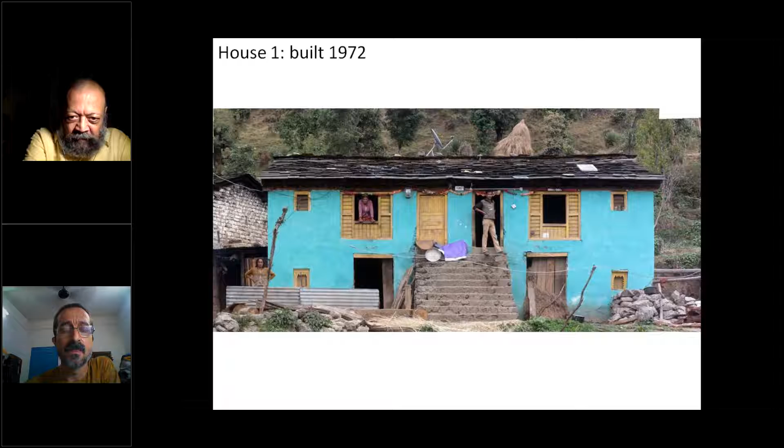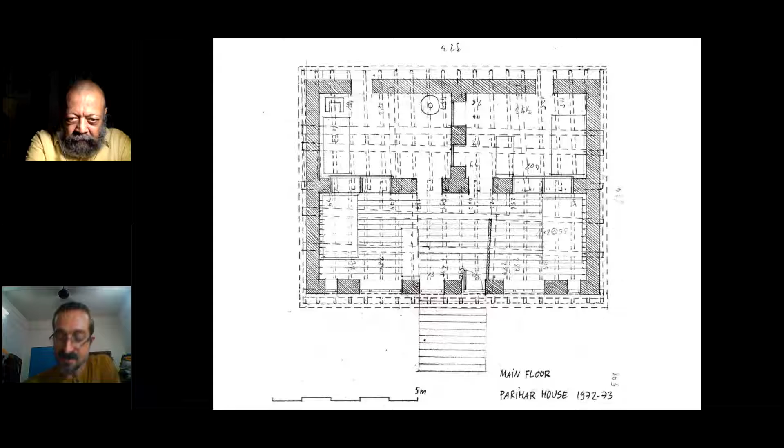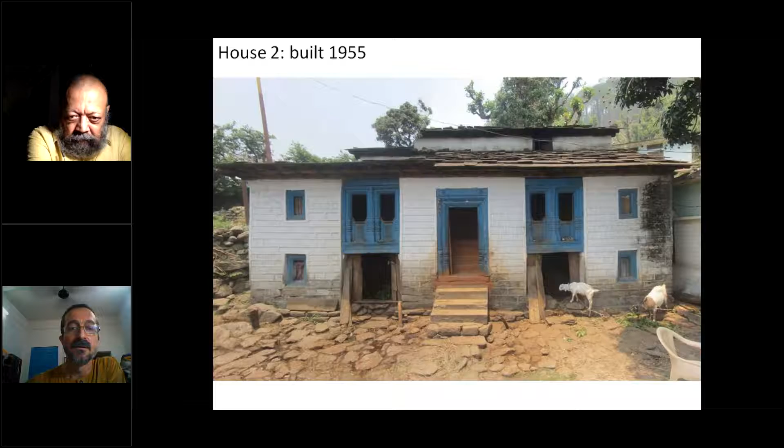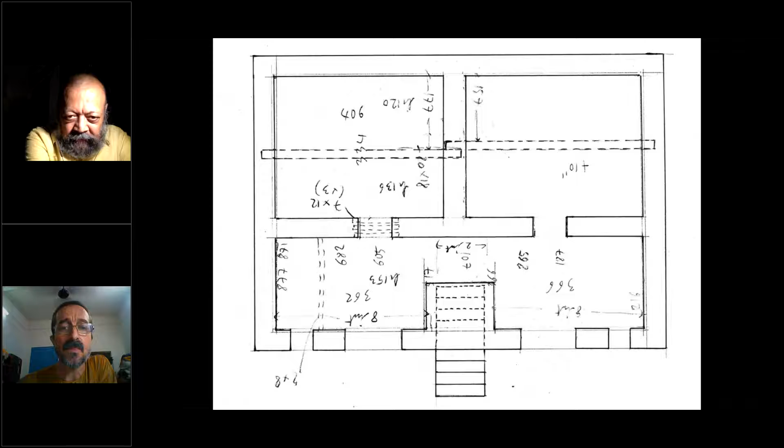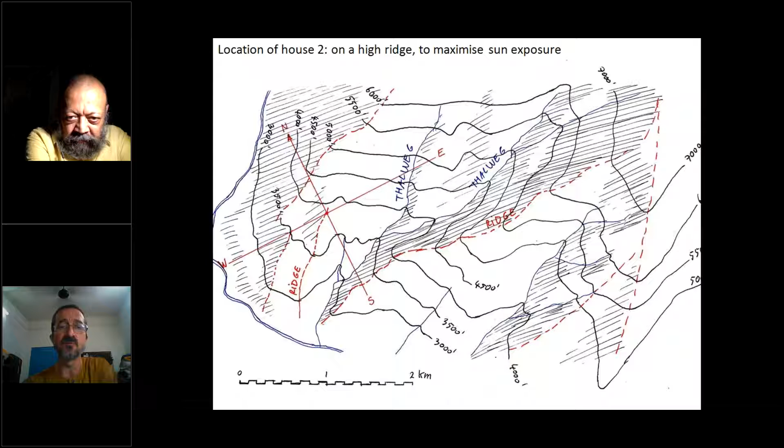This is a measured drawing of the main floor, of the ground floor, where the cattle stays. This is a section, some details. And this is a contour which you can get easily from Google. You can trace the contour on Google Maps by using the levels.

Now I want to show an exercise which I learned from my professor Jacques Fredet in the School of Architecture. It is an exercise by which, after you have done a measured drawing, or if you have a drawing of an existing building, you try to recompose a sequence of decisions that have led to the design as it is, with the basic assumption that every decision has some reason. This is the only assumption you have to make.

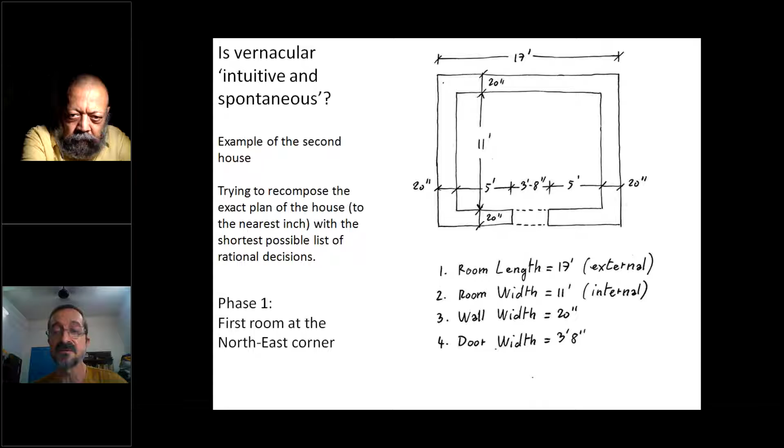Generally, in vernacular architecture, the measurements are in round numbers. It will generally be in feet, or maybe to the nearest 6 inches. So these are the basic dimensions of one room. This is my supposition: I think they started with one room in one corner, and I get round numbers everywhere. So basically 4 decisions: the length, the width of the house, the width of the door, and the thickness of the wall.

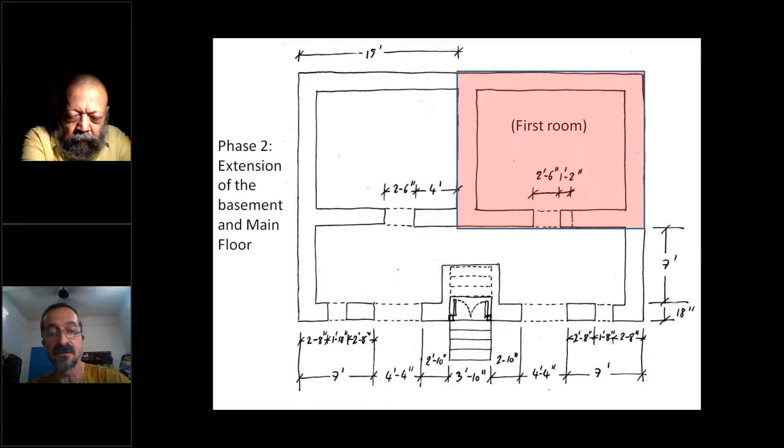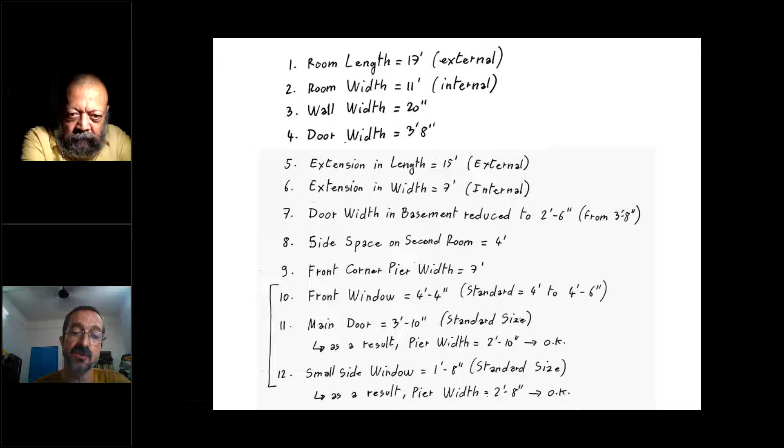These are 4 decisions necessary to make this room as it is. Then, again this is my assumption, but I think the house has been extended on the left. So in red is the first room, and in black and white is an extension. This is a series of decisions taken to extend the house on the left. There are 9 decisions, and some of them are not really decisions, like the width of the pier — it is a standard width, and all the widths of doors and windows are also standard. They are the same in this region of Uttarakhand. So what you find is that you have a very small list of decisions which leads to a plan.

And it is very rare that you find this in architecture done by architects. In vernacular architecture, generally the decisions are highly rational and highly constrained, because these people do not have excess money, and there is not much scope for fantasy.

And it is really very striking for me that you get some extraordinarily beautiful results in such difficult conditions, where money, time and resources are all in short supply, and yet they achieve these results.

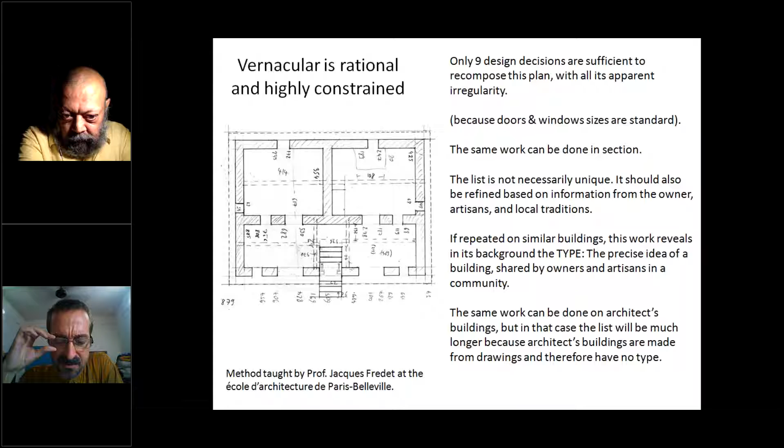So, one definition of vernacular architecture is that it's architecture done without drawing. So how can you make architecture without drawing? The answer is in the type — what we call the type of building — which is a mental idea of the building that is common within a community.

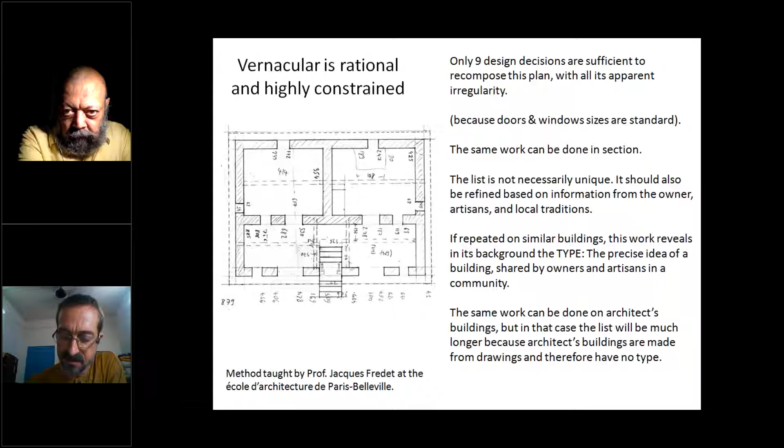He was working several days making these drawings. One day he saw an artisan coming, and the artisan asked him what this complicated drawing was that he was doing. He explained, and the artisan told him, 'It's very simple, I will make a 3D model in plaster and give it to you tomorrow.' The next day the artisan brought the capital, done absolutely perfectly. Then the architect made a drawing based on the model done by the artisan, and he could officially hand over the drawing to the artisan so that he could execute the model.

So this is very interesting because it shows that architectural drawing is always based on a set of available skills. Basically, a drawing is a description of a work to do, and as our basic assumption we need some existing techniques, methods of representation, and typical objects which exist. So it means the notion of type is still very much present.

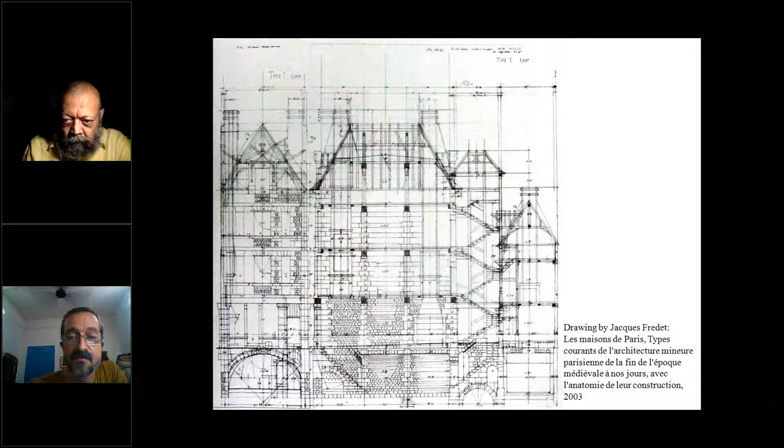This is another drawing which he made on AutoCAD. I was, like all his students, very disappointed that he started to work on computer, but I think he took it as a kind of exercise to prove that it was also possible to use computer to do this kind of drawing.

This kind of drawing raised many questions. I met some senior conservation architects in India. They told me, we don't need measured drawing, there are too many measured drawing already, what will we do with all these measured drawing? It sounded very strange to me, like someone telling me we don't need to do yoga anymore, we've been doing yoga for hundreds of years, why do you need to still make yoga after so much yoga?

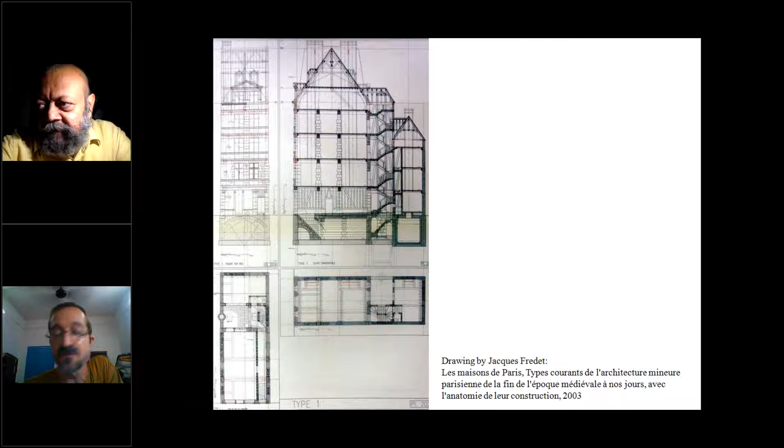It's the same reasoning. So to do a measured drawing is not to keep it in a store somewhere, it is, we do it for the sake of doing it. It is a learning exercise. This is why Jacques Fredet did this drawing. For him, it was to keep the memory of these buildings, because these buildings, as he was saying, were being destroyed at the rhythm of arbitrary executions. He was seeing all these buildings being destroyed one after another.

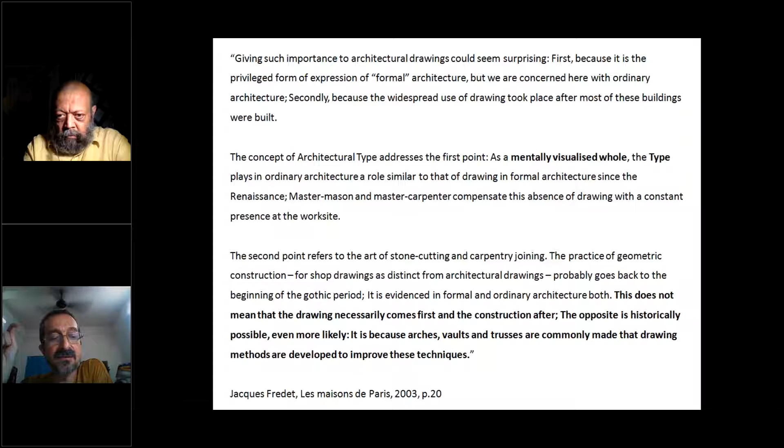And now, why making today drawings of buildings which have been made without drawing? His answer is that these buildings have actually not been made without drawing, because there was an ancient art of stone cutting and carpentry joining, which is what we now call shop drawings. This does not mean that the drawing necessarily comes first and the construction after. The opposite is historically possible, even more likely. It is because arches, vaults, and trusses are commonly made that drawing methods are developed to improve these techniques. So it happened quite often that the art of making drawing happens after the art of building has started.

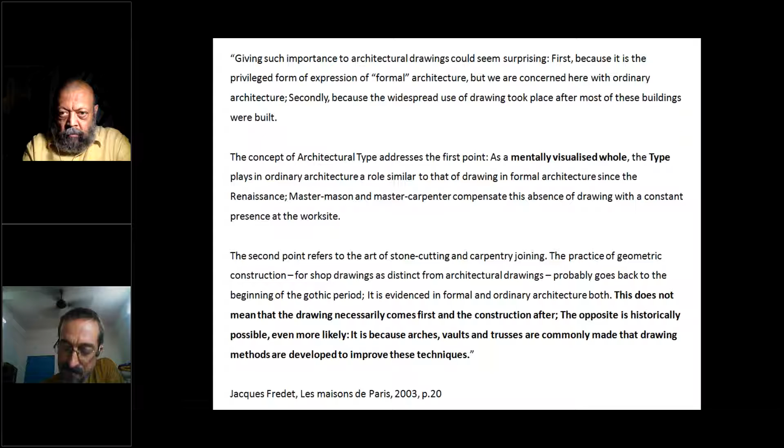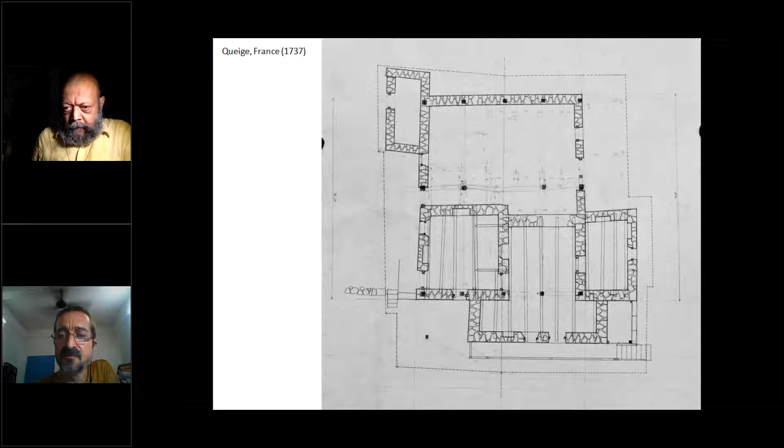I want to show some examples of measured drawing. This was a house of my parents in the Alps, in the French Alps. This house was built in 1737 and it was covered with thatch. This is a plan, it fits approximately in a square of 20 meters by 20 meters. The walls are made of stone with mud mortar, and you have a massive wooden framework made of chestnut trees.

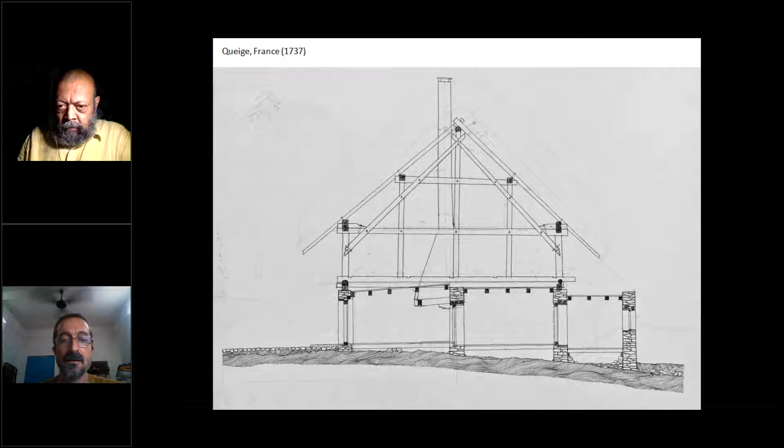This is another house in West Bengal in Birbhum near Rampurhat. It has a very interesting veranda with a huge opening. You can see on the plan on the bottom right, there is a beam and there is a wooden framework in the middle of the veranda. So it creates a huge opening right in the middle of the house with a big amount of light entering.

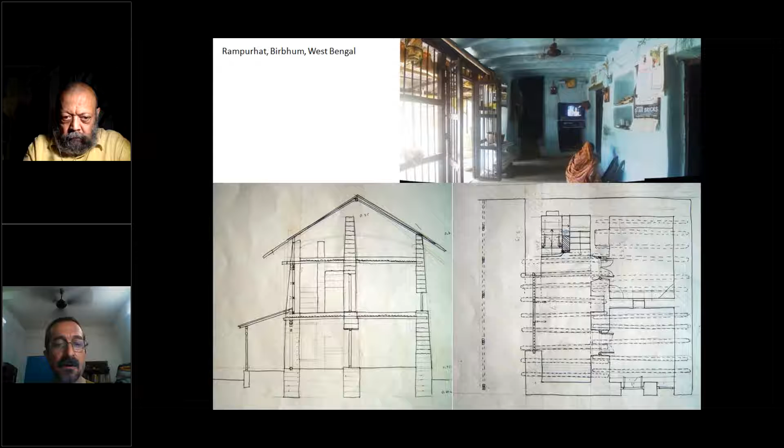Now I would like to start talking about how structural design has helped me do as an architect what I wanted to do. This is a building I built in 2003 for very close friends who wanted to make a school in his village. And very generously, he told me, Laurent, you do whatever you like, I will not ask any question, you just do your building.

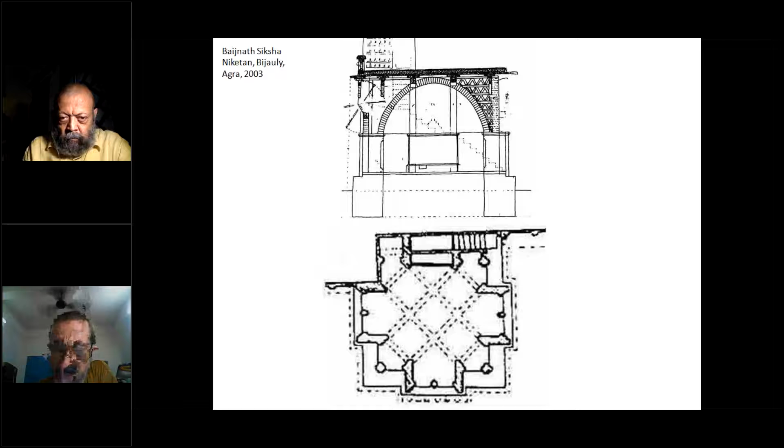So I decided to do a building which would not have concrete and also not have steel. I did not succeed in eradicating steel, it has 200 kilos of steel, but it has no concrete. So this is a plan. It was inspired by arches crossing each other at 45 degrees, which is a design you find in many churches of Armenia. These are some detailed drawings which I did to study the brickwork and the exact dimensions.

Another detailed drawing. This is how I found the profile of the arches. I needed arches which would be in catenary so that they would be stable under their own weight. On the left, you can see there was a wall on the site itself.

I hung a rope and traced at the scale of 1:1 the arch, even tracing every brick, in a reversed form. On the top left of the photo, you can see in section view the masonry pier and the thrust line continuing into the masonry pier. And it was showing that the thrust line falls right in the middle of the pier, so it was perfectly stable.

On the right, you can see how I made a kind of brick formwork in which I bent bamboo. This is something I would not repeat today. I would do it with steel instead, because bamboo is very strong, but the joints are very slippery. Steel would have been much better because it's welded, it doesn't move, and you can reuse the steel.

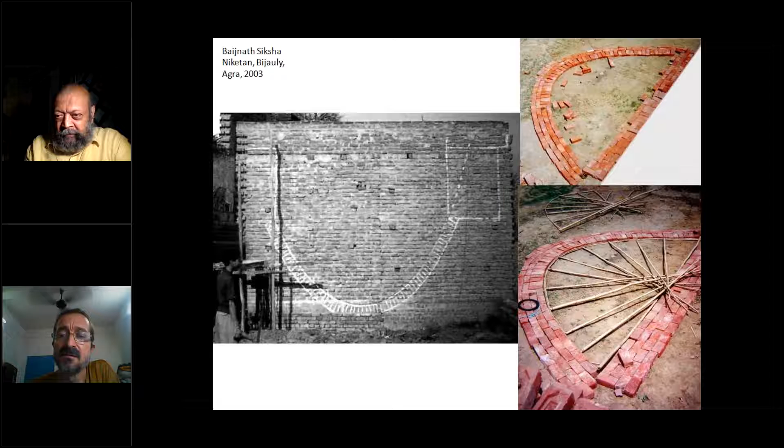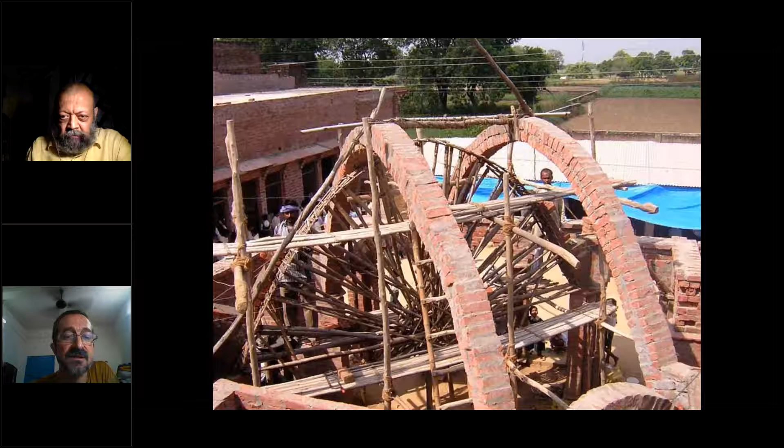So anyway, we built the arches this way. Here you can see the bamboo shuttering.

Two arches are already built, and we are making the third one. The two arches on top are attached together by a piece of wood. This was absolutely necessary to stabilize the arches, because they were standing on their own without any lateral balance. So this temporary wooden frame was absolutely necessary. Here you can see how slender they are.

Now I would like to share a personal experience with you. When I was building these arches, I had checked their stability by calculations several times. And one morning, very early, I woke up from a nightmare. I had dreamed that the entire village was running after me because the building had collapsed and killed 20 children. I was running through the countryside, and then I woke up.

I sat at my desk again and made the calculation a third way, and again found there was no way it could collapse. On the bottom right, I've written the calculation. It's extremely simple: you calculate an arch by the standard formula. It's basically a beam, and you consider the rise of the arch like a lever arm. You find the thrust, the force in the arch, and the stress. The stress was very, very low. It could take a massive load, and because the arches cross into each other, the buckling length was also very low. So there was absolutely no problem, and I went ahead.

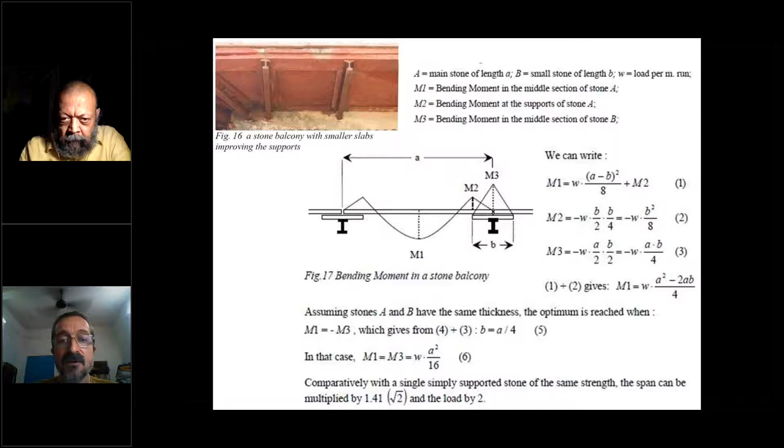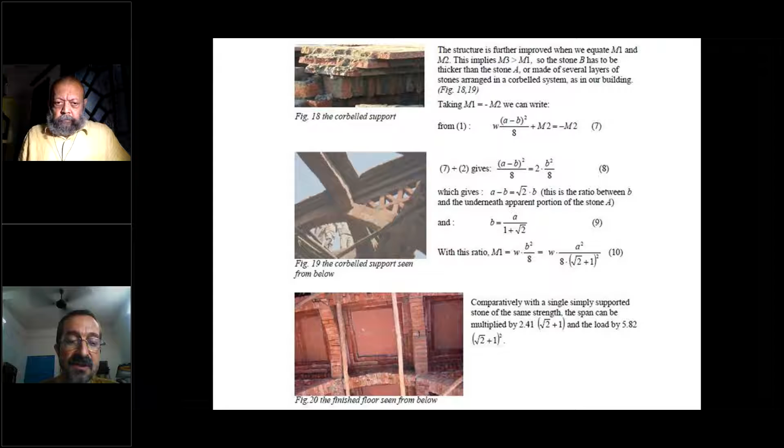Now I come to the system -- why I wanted to study this corbel system and how I could increase the span. I placed a series of corbeling. On the photo bottom left, there are 3 successive corbels. Like that, I could increase the span even further. So these are the calculations, and this is the construction.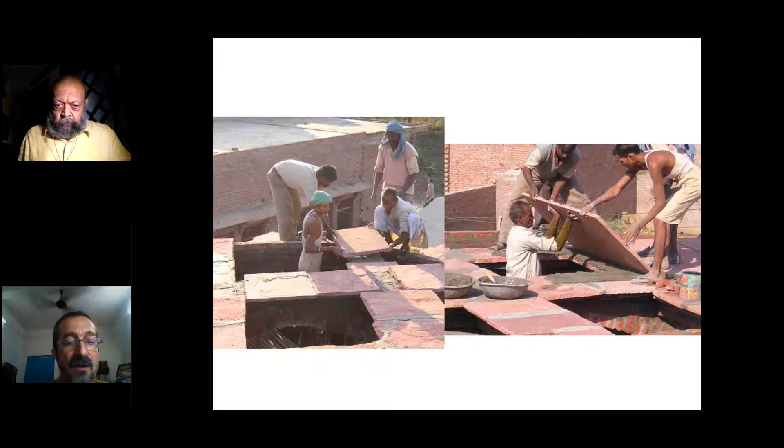And here on the left, we are placing the corbeling stone, and on the right, we are placing the large stone.

The villagers were a little anxious. Sometimes they'd ask me, Laurent, when shall I call the concrete mixer? I'd say, why concrete? There is no concrete. They'd say, are you sure? Yes, yes. But it was only when we had placed this stone that they truly believed there would be no concrete. So all my friends, his father, and the friend of his father, everyone was there to celebrate that the roof was finally covered.

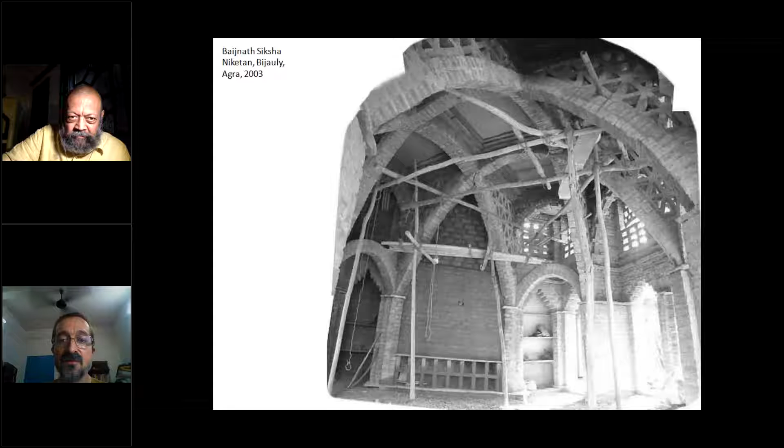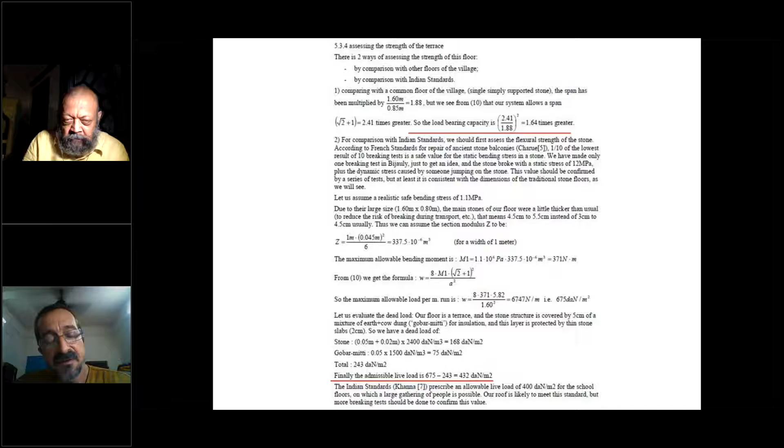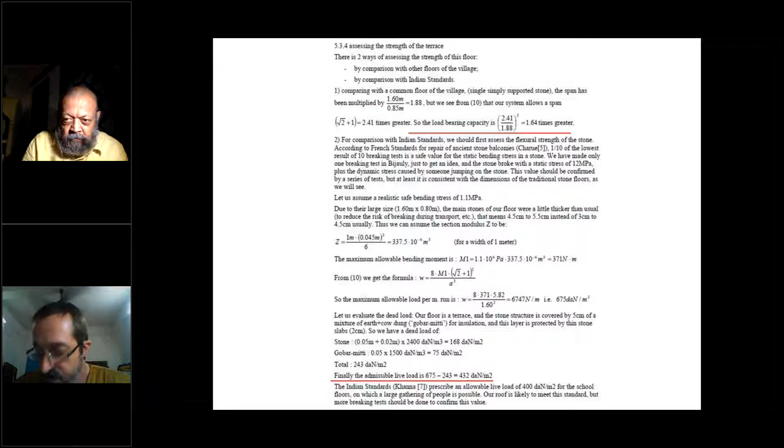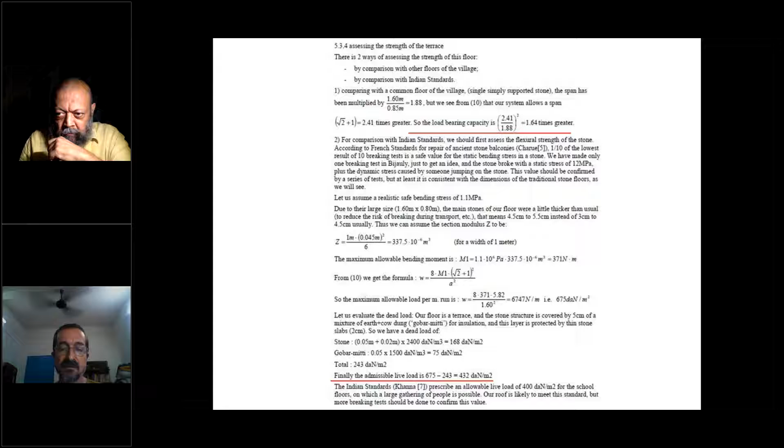This is some calculation I did to compare the actual safety of this floor with other buildings. There are two ways to compare. One is with the conventional floor system used in this region, which is valid because that system has a safety level people expect, and the notion of safety is related to expectation. So it's important to have a socially accepted standard. I found it is about 64% stronger. Comparing with Indian standard, I found it can take 432 decanewtons per square meter, which is good, since the Indian standard prescribes 400.

Now, this is another project I did while working for architect Dulal Mukherjee in Kolkata, and he gave me a very nice opportunity to do a lot of experiments.

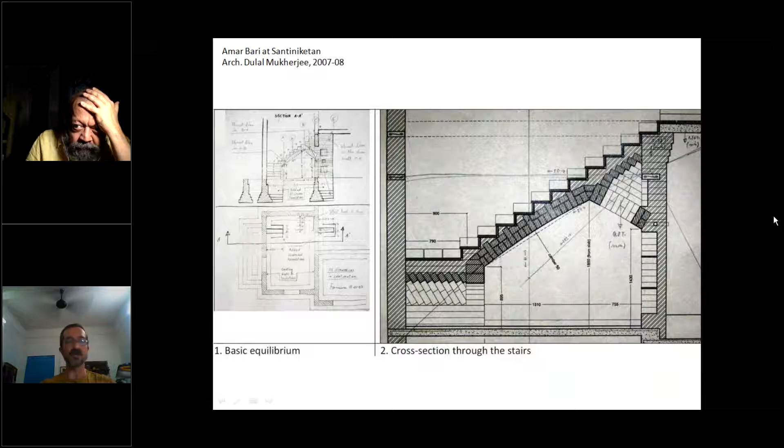So first, I wanted to do a staircase without concrete, based on an almost flat arch, an arch with a very light camber.

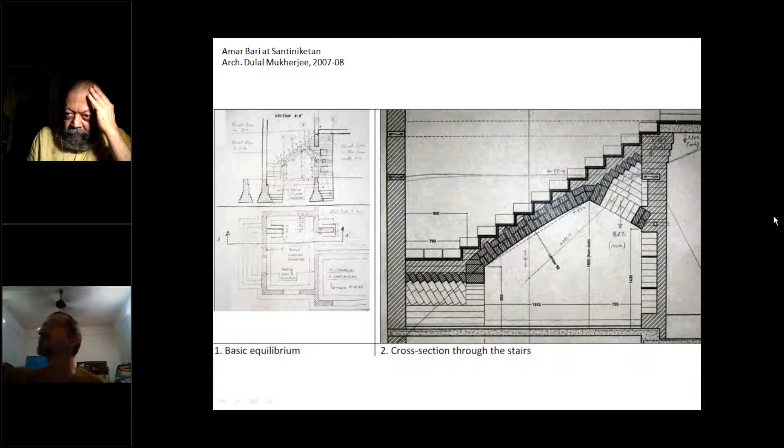These were the calculations I did. Dulal Mukherjee had two in-house engineers, and they were very afraid to do a staircase without concrete. So I did this calculation and showed it to them, but they were having none of it. They told me, no, sorry, Laurent.

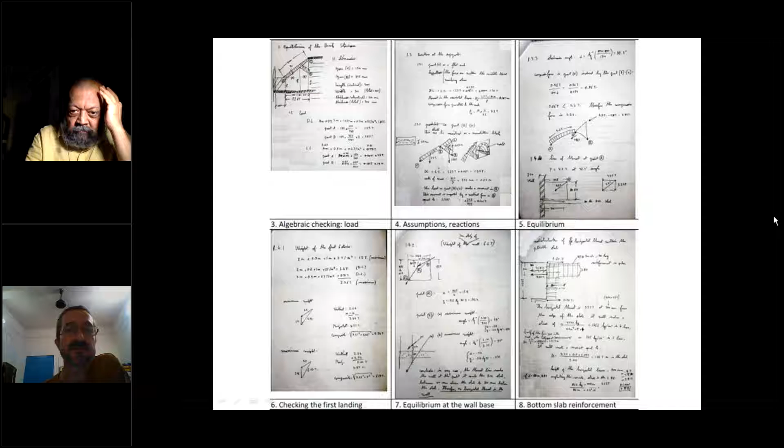Okay, this is a completed staircase.

Okay, I'm doing first. Now I want to show you practically how. Screen. Do you? Oh, now I have to share my screen. Show screen. Can you see my screen? Yes. Yeah, can see your screen again.

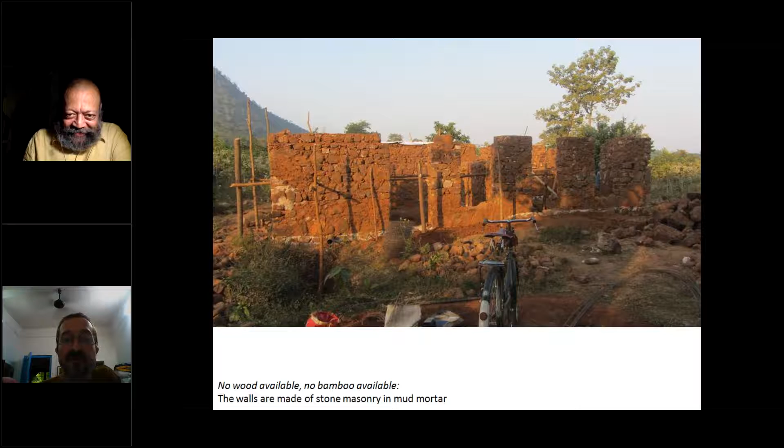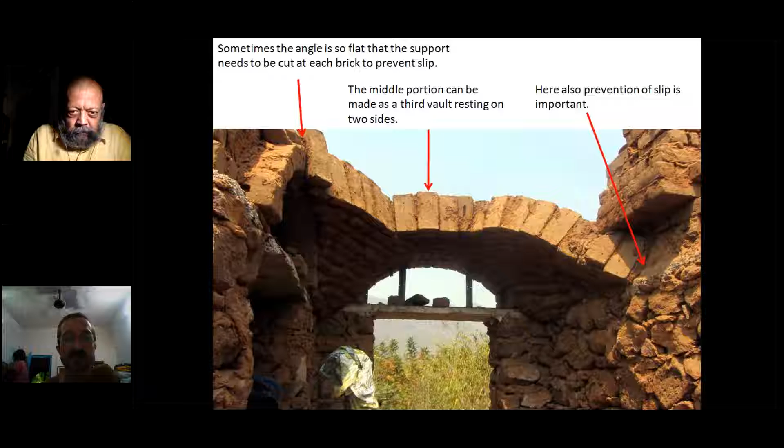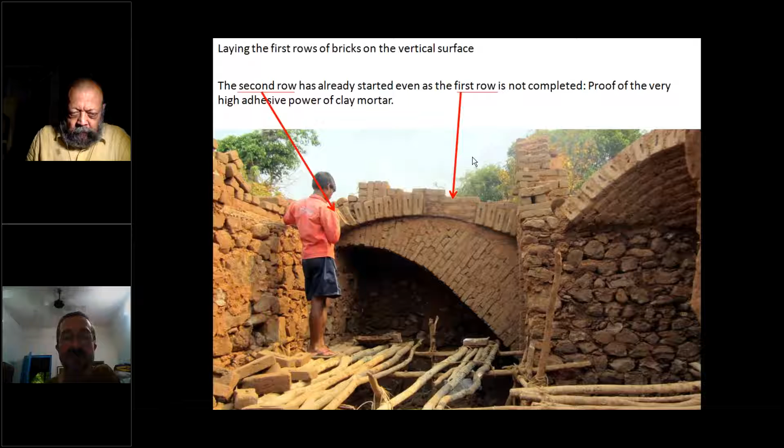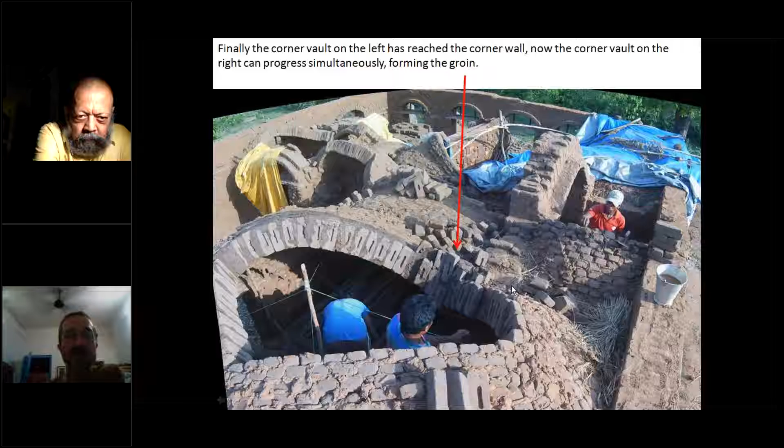So this is how the vaults were being done. This is the inner corner, inside the middle of the room, and it was a bit difficult, but we managed to build without shuttering. Here you see the corner growing, coming inside, and this is a completed room.

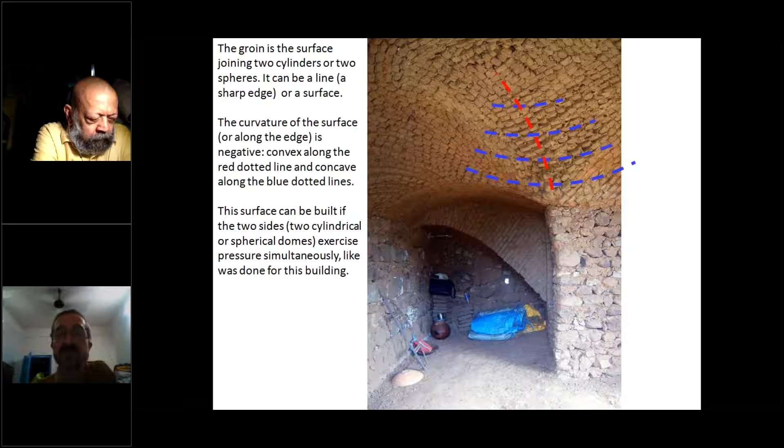This is called a groin, meaning it has a negative curvature. Here you can see the negative curvature, it has the shape of a saddle. So it is possible to build even this without shuttering using adobe. Adobe is an excellent technique to learn how to make this; you gain a lot of understanding of the structural behavior of domes and vaults.

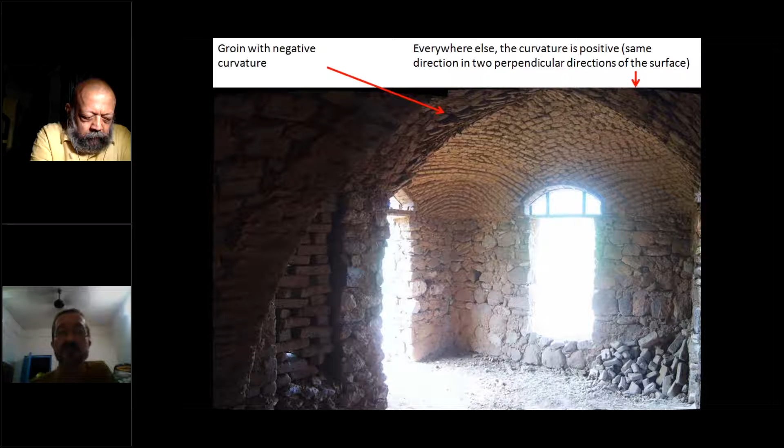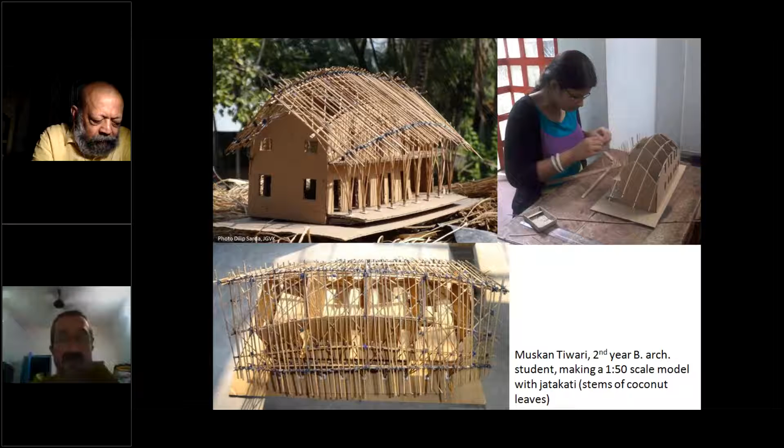This model shows each bamboo, absolutely every piece is there. So looking at the model, the mistri could elaborate a process of construction. These are the working drawings, and these are joining details. Everything is joined by lashing, bamboo to bamboo, and bamboo to concrete.

It uses the Colombian method of joining, elaborated by Oscar Hidalgo and Simon Velez, where you grout a rod inside the bamboo.

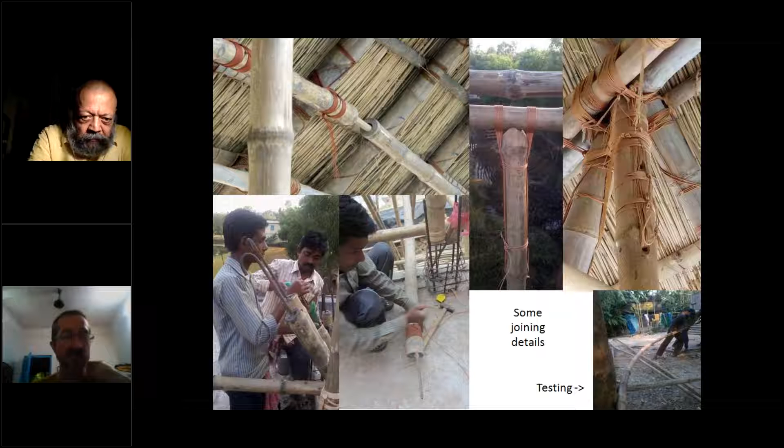Some joining detail: very often in bamboo joining, especially whenever you use lashing, there must be an eccentricity because the bamboo must extend beyond the point of joining. I'm showing on the left this eccentricity, so you need to keep this in mind when you make your purlins and rafters, and if you're systematic, it works very well.

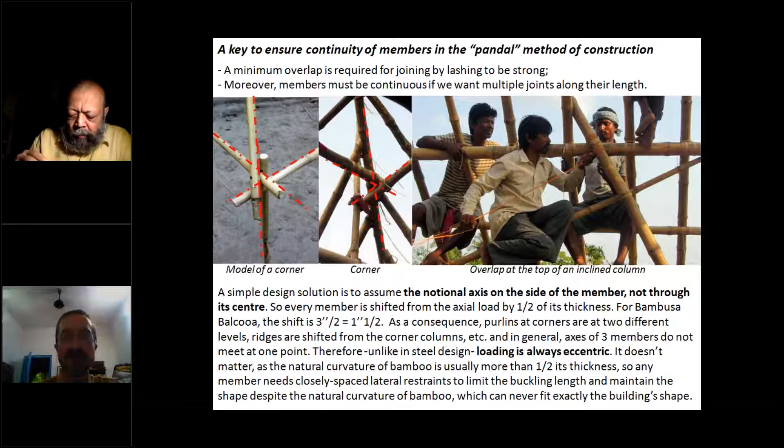So these are some construction photos. This is another similar building, a house, and there's a calculation for the bamboo.

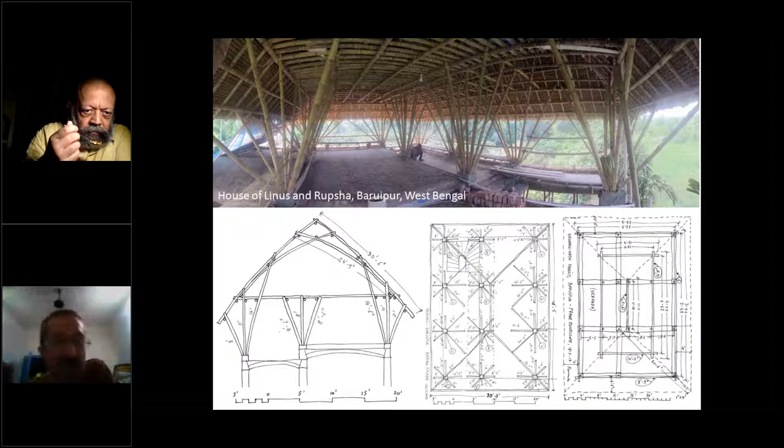The view of the house. Some view of this, this is a staircase which was done by a dome mistri, essentially using the dome technique, but in a slightly different way.

This dome technique is a very ancient technique, but recently, in the last 30 years, mistris from Uttar Pradesh have developed a way of making domes without shuttering, using normal cement mortar, which is a totally new innovation. Generally it was done with plaster of Paris, with mud, using tiles, but never with bricks and cement. Now we can use normal bricks and normal cement. This technique becomes really low cost and available to everyone. Actually, it is cheaper than a concrete slab.

This is a spiral staircase made of bamboo, the same house. This is a roofing detail with thatch, very high quality thatching done by Matha Chaat, which is a thatching company from Bhuj in Gujarat.

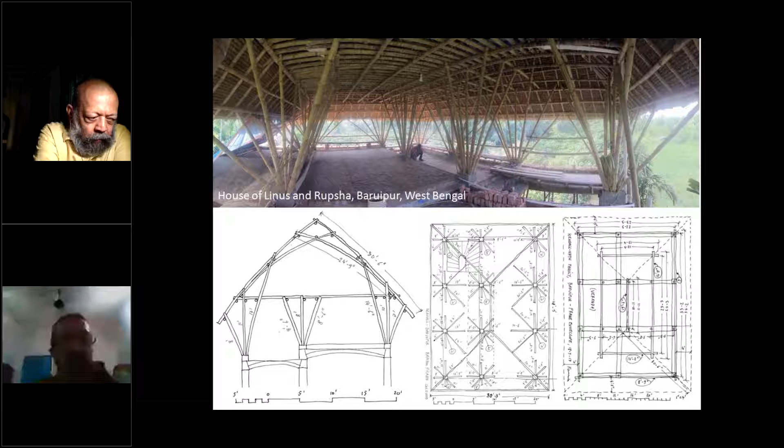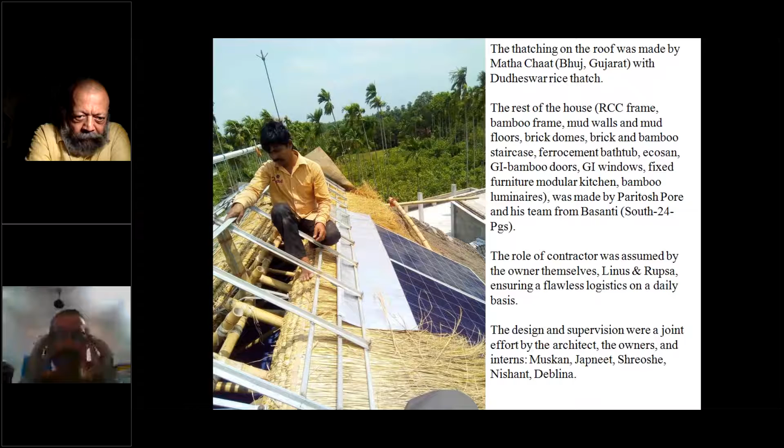What is very interesting, Le Corbusier had these 5 tenets of modern architecture. During my studies, I hated Le Corbusier. These 5 tenets were building on stilts, roof terrace, free plan, horizontal windows, and free elevation or curtain wall. As a student, I was wondering how Le Corbusier became mad enough to write this.

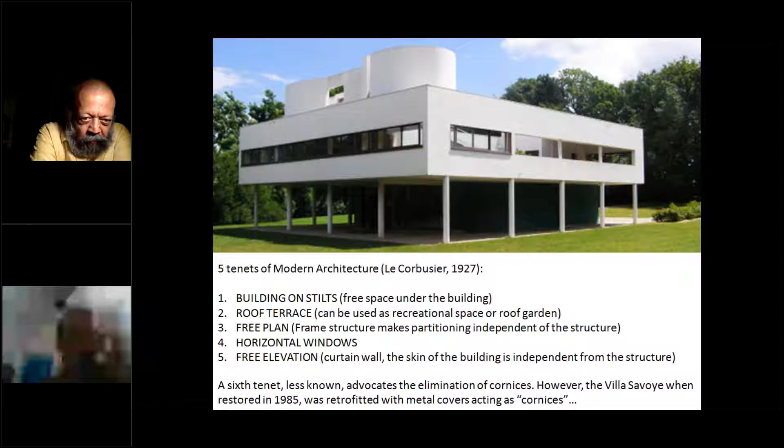Then just 2 years ago, after I completed this house in Baruipur, I found that I have actually followed these 5 tenets. My house is on stilts. It has a roof terrace. It has a free plan — the partition and the column are totally independent. All these columns are slanted, so of course this cannot be slanted. Horizontal, all are horizontal.

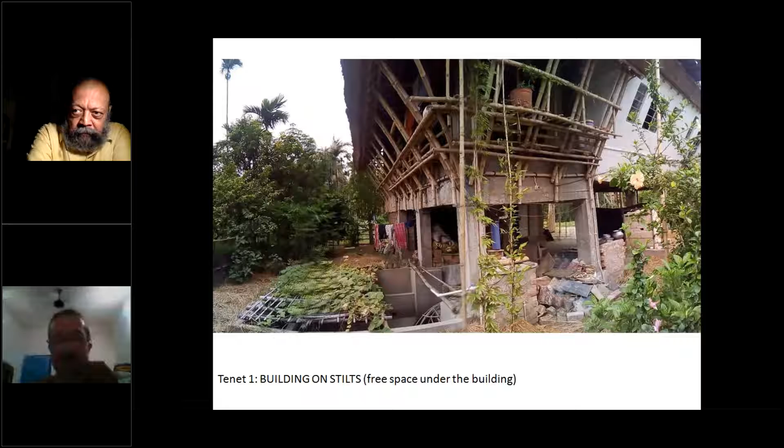All my walls are curtain walls. They are hanging from outside. They do not rest on the floor, they actually physically hang from outside — curtain walls, Le Corbusier. So it was funny to me to see that eventually, one day, I have been following the 5 tenets of modern architecture, which I really hated during my studies.

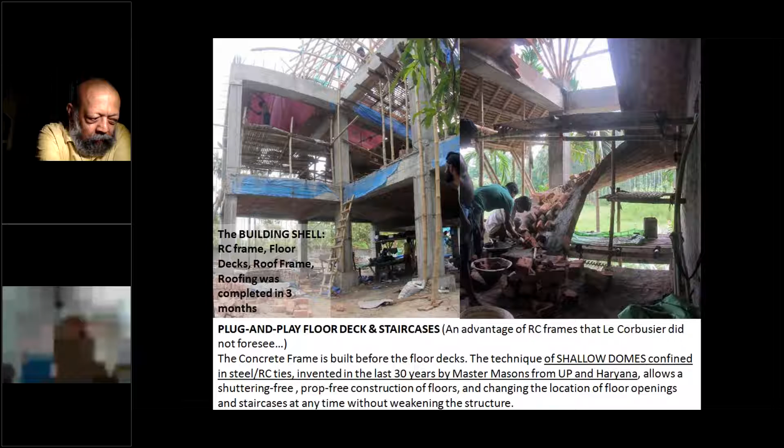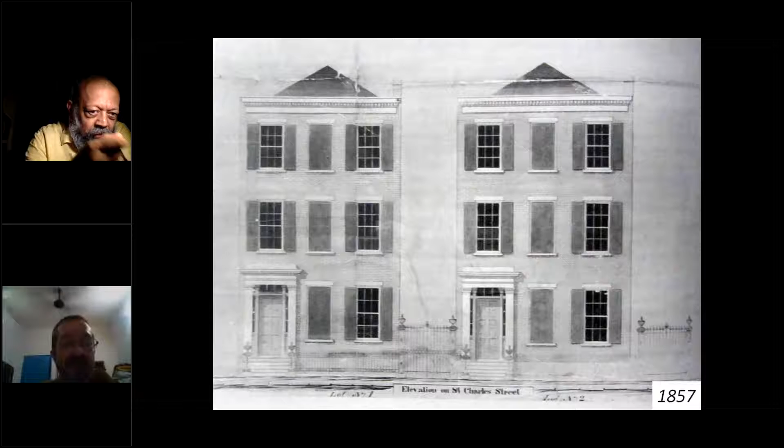So I think I have completed my presentation.

Can you hear me? Have you ended your presentation, Laura? Yes, I have finished. Okay, so thank you very much — we had hoped to get a very different view, a kind of outsider's view from the inside, as it were, which I think we've all got. There are still, just a minute. Yeah, Laura? Yes, okay, sorry, so that was you calling. Sorry. Yes, you couldn't hear, my mistake.